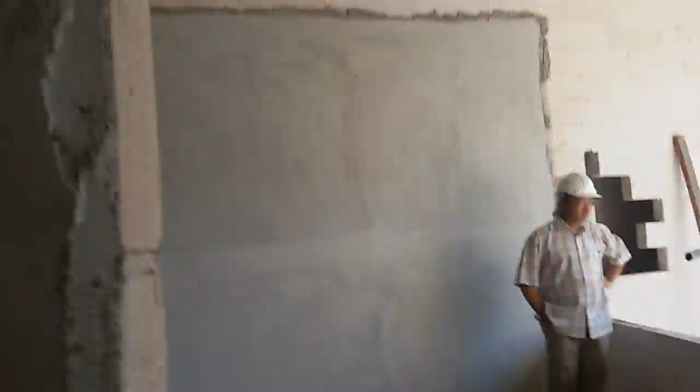So expecting the bollards for the lighting of the landscape.

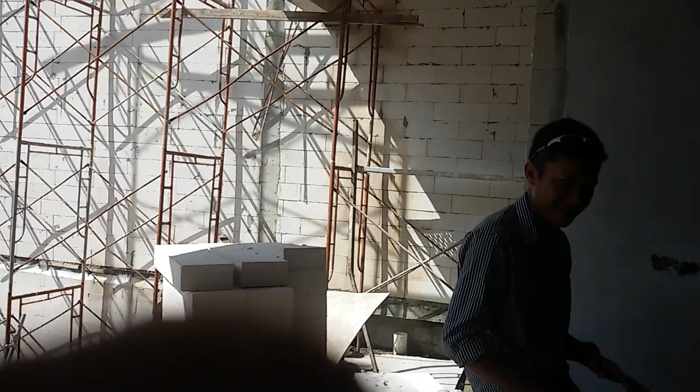Kiosk. But this view is okay as long as the landscape is retained.

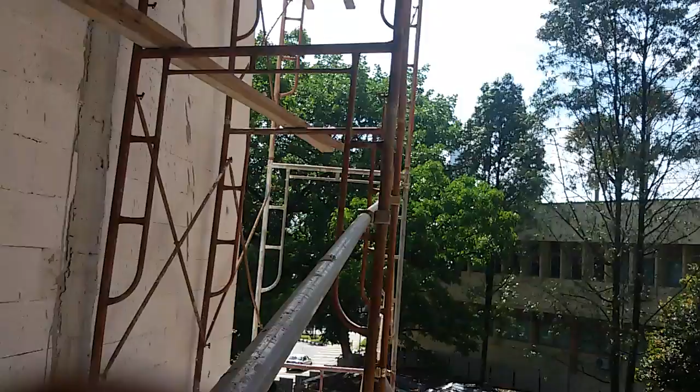We are thinking about optimizing the area fruitfully and effectively and beautifully.

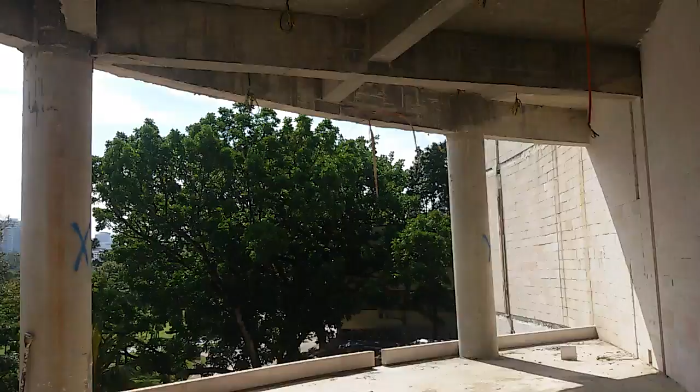There's still work to do, work on the classes. This is the main library on the right hand side.

This is level 2 of the building. This is Lengkok Cendekia, goes to the part where the bus can depart. And on the left is Lengkok Ilmu, Persiaran Ilmu. They keep changing the names. Yes, in front of us now is the Faculty of Education.

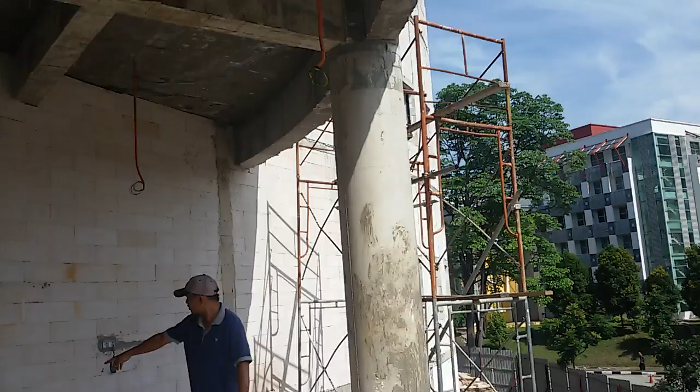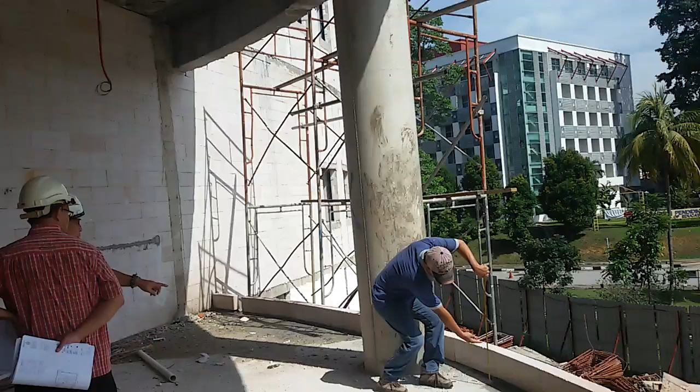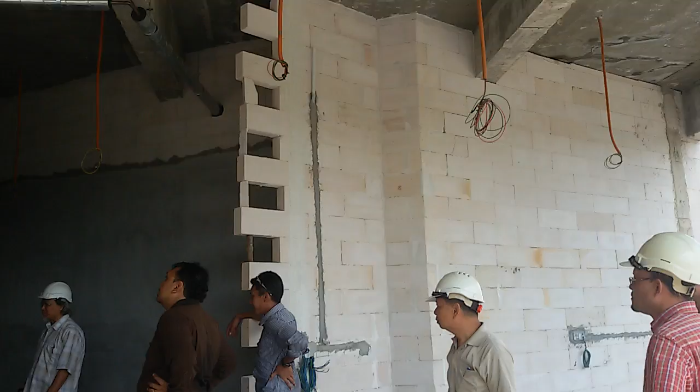And consultants involved is of course the Architect, Rekabena of Malaysia, in collaboration with Biagado Architecture of Rome from Italy for the architectural, and C&S Civil and Structural Engineers, ML Consultancy Service of Malaysia, and M&E Engineers, Mechanical Electrical Engineers, is JBT Engineers, and of course QS is very important, is consultancy is FRS.

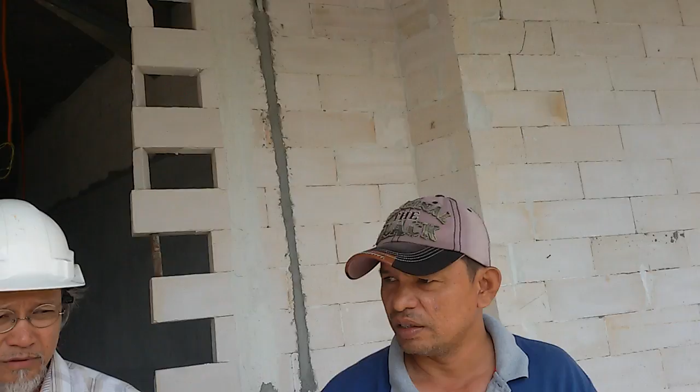Let them discuss among themselves or just take the photograph. I still set the video, don't need to disturb their discussion. Whatever the outcome of the meeting now will be tabled in the table meeting, and then they take their conclusion from that and they proceed with the works.

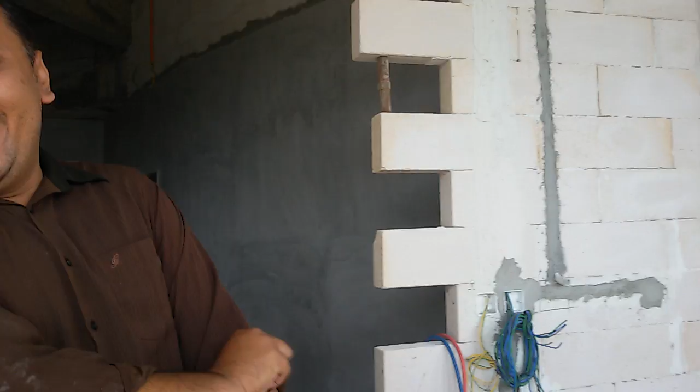Come, follow the leaders.

Workers are very busy doing their works, busy works, we're not going to disturb them.

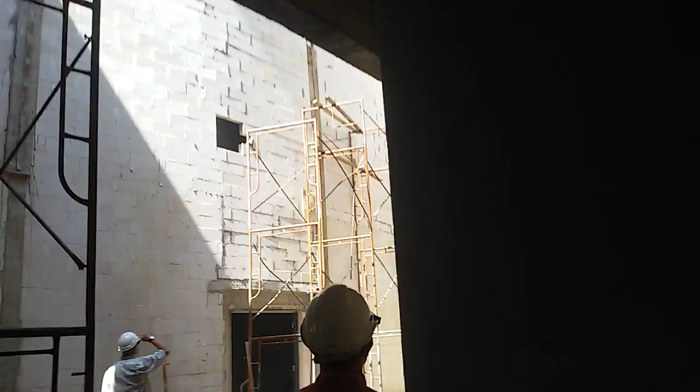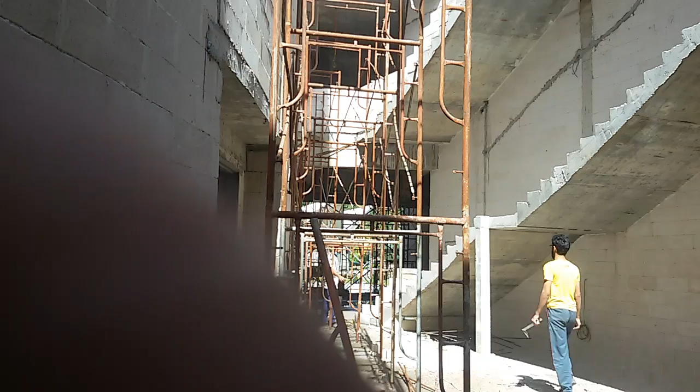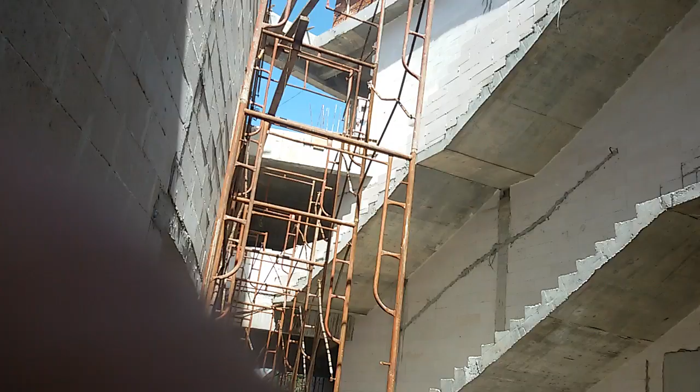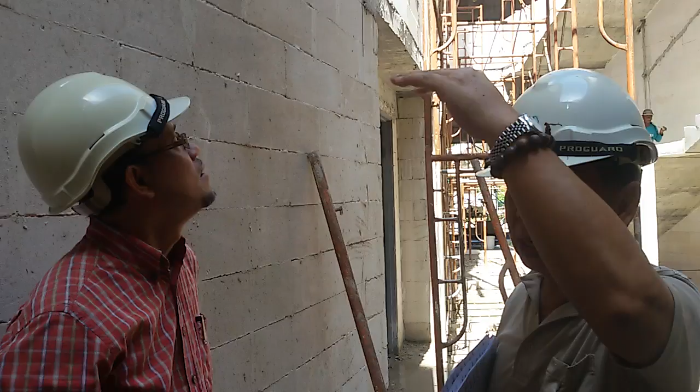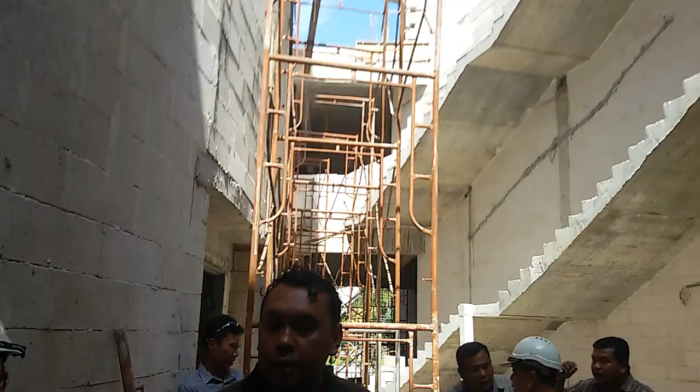New glass window addition. This will act as bursa saham di SKI. Later on, the student will learn how to trade through their forex activities and also basis of money business. That one is structure and all that.

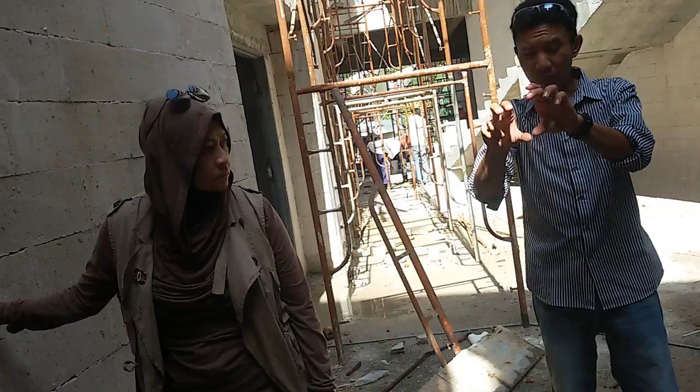Sekarang ni saya nak tahu beam pelak, bila kita join boleh ke tak dengan batu ni? Pelak kat slab boleh, the plugging. Plug on the slab, join from the beam. Tak boleh sampai beam ke? Memang sampai beam, sampai plugging tu with the beam.

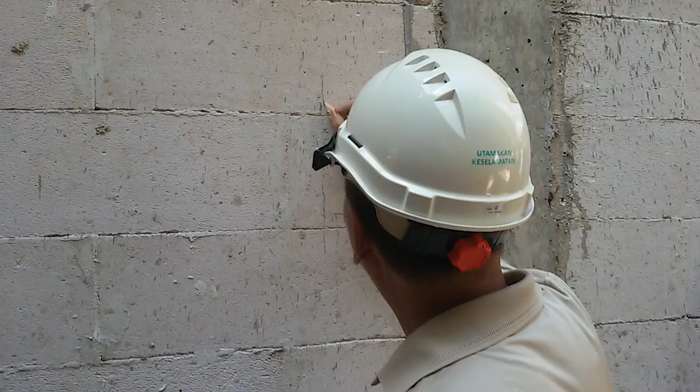Sini grill, they're not really on the wall plugging tak. Diffuser tu dia plug on the beam. Beam is the support. This is not plug on the wall.

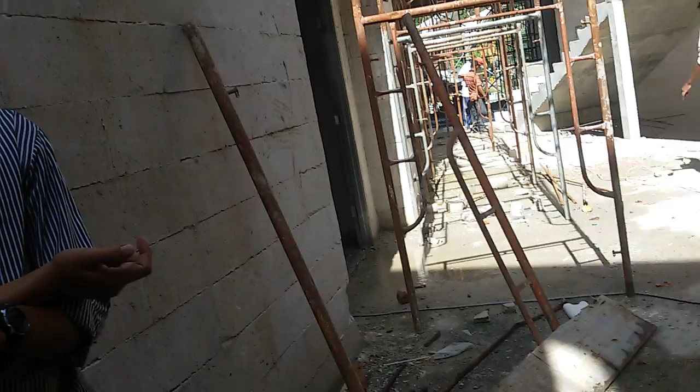Saya boleh buat, saya tak ada masalah. Tapi kalau dia akan, let me do the calculation, okay? Ini calculation.

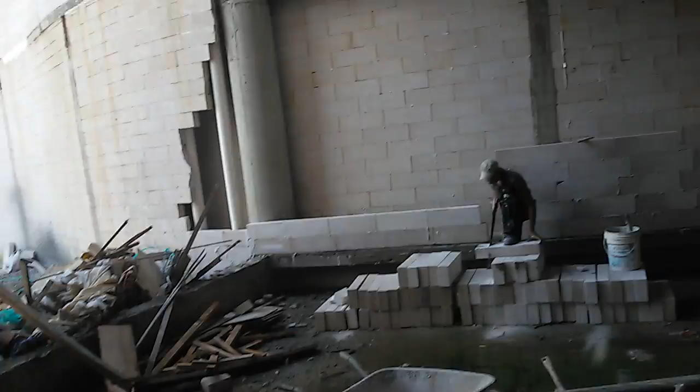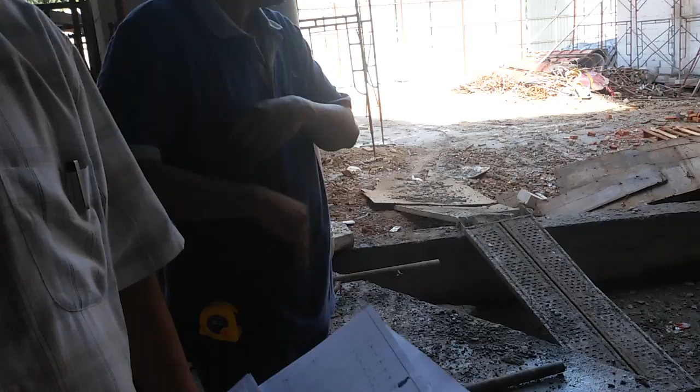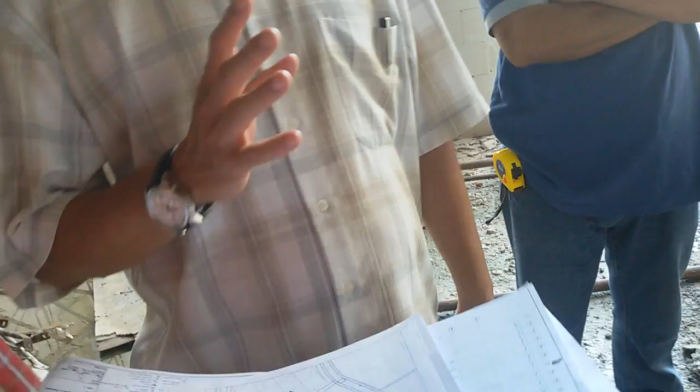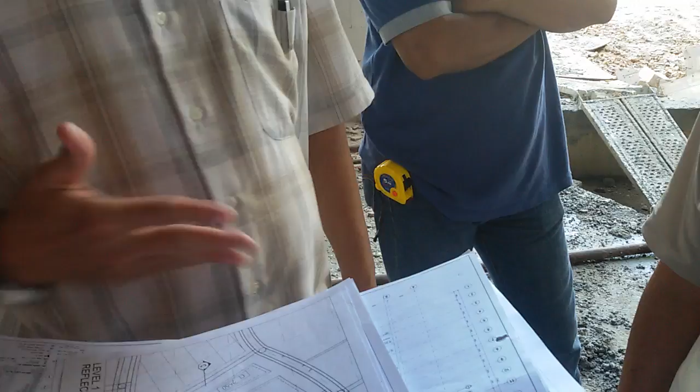That's, I think, I keep saying that there's a beauty of the design. Any small embellishment like this can be easily disguised, you see? That's a good thing, disguised by the irregularity. Yeah, betul. Although it's a very strange mix of regularity, order and disorder, you know, this building. Yes, that's the idea. There's disorder, tapi is ordered, disordered. Orderly disorder, also disorder. Yeah, whatever you name it, it will conceal lah. There's some kind of contribution lah kan. Tapi the order comes from the contribution to the beauty from the grid. You see, the grid is all modular. You can see, kan? All divisible by 300. You see, the grid, that is the modular. But then the disorder is because of the curve. You see, so if you need to bend this, if the contractor set this out, lain sikit pun you won't notice.

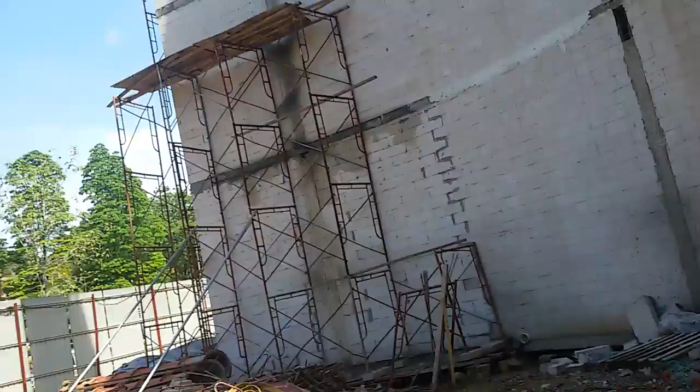So we are on the ground floor now, going towards the meeting. It's a meeting.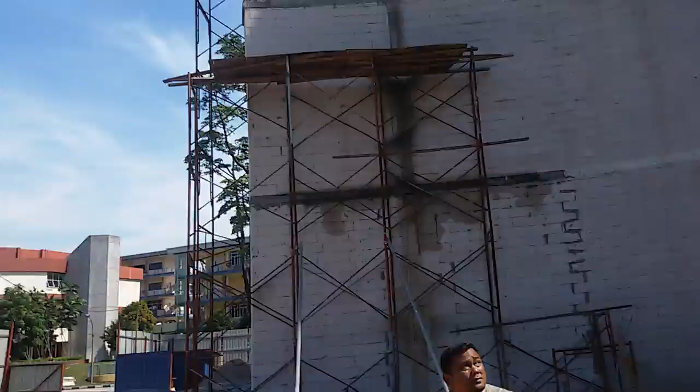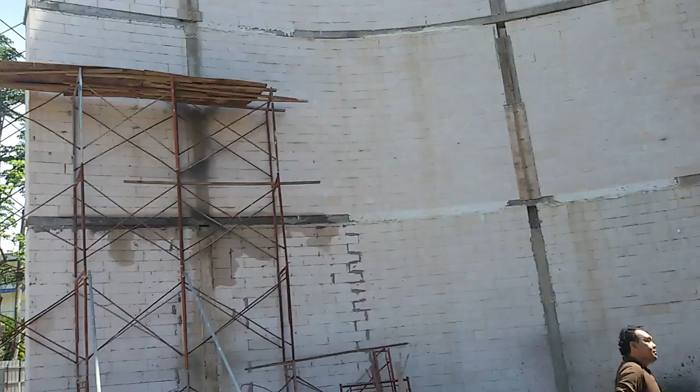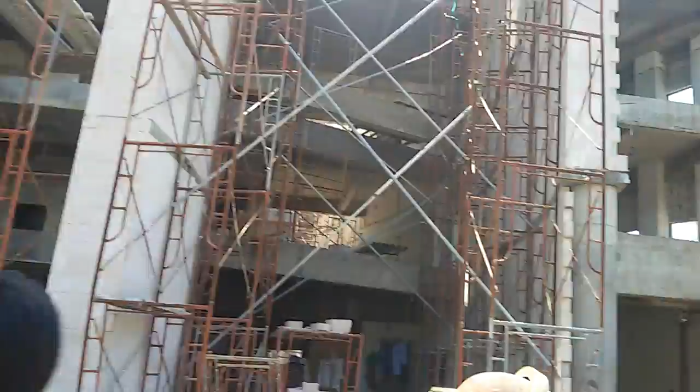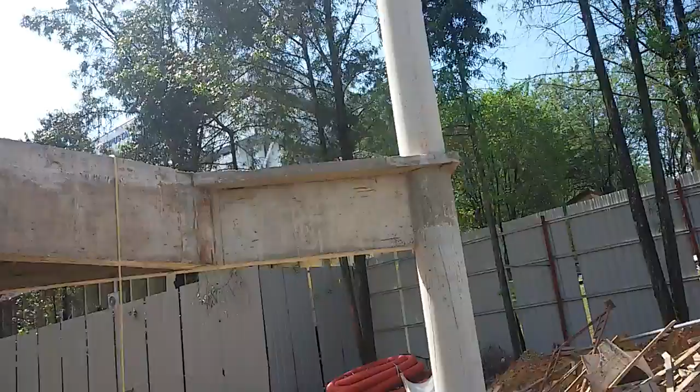I'll take a round from the building in proper to make this report complete. Make one roundabout from right to left, anti-clockwise. This frontage on the right hand side. I again state here, this our right hand side is our existing Faculty of Business and Accountancy building.

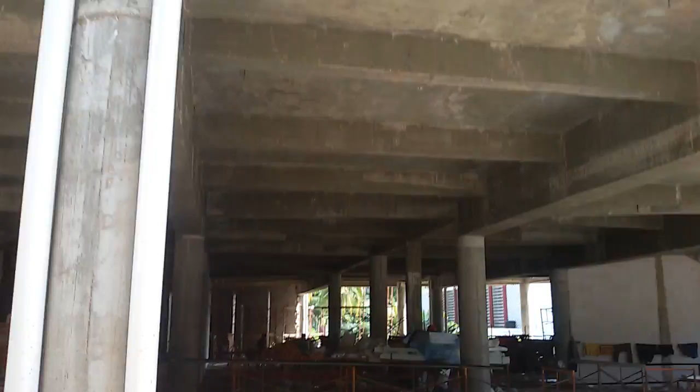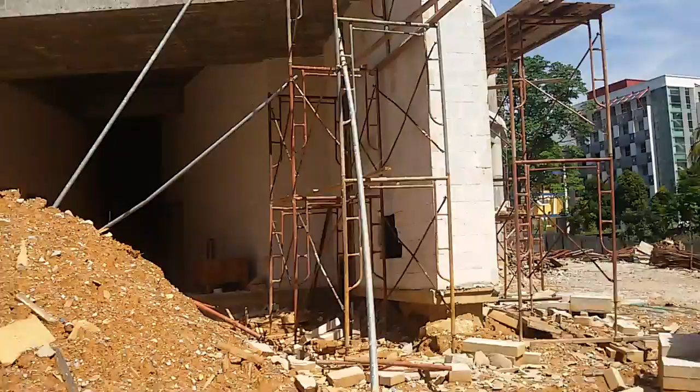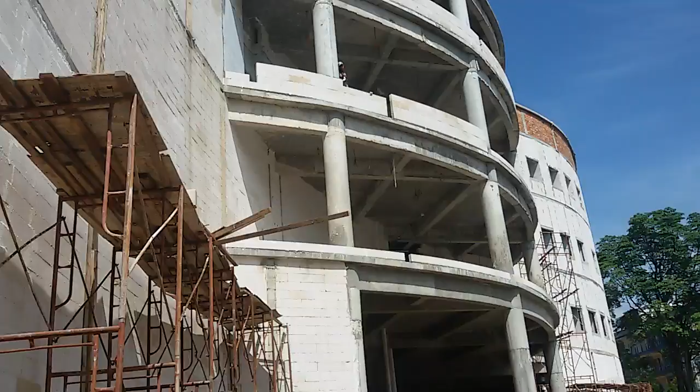I'm really at the eastern part of the building now, portraying the video shot to the buildings. On our right hand side is our main library of University of Malaya. Housekeeping has been done on top floors, but left on the level 1. Not yet done. We're keeping it to the right moment to clean it.